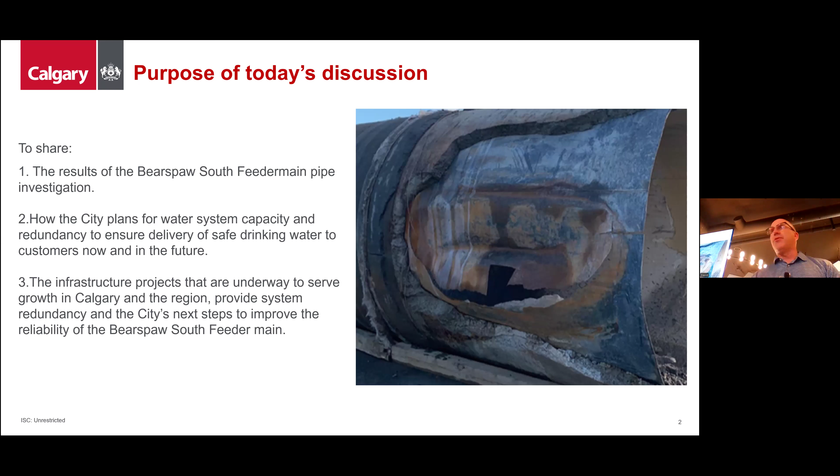So let's talk, as I said, love to geek out a little with you all and talk about the pipe investigation itself. As many of us are aware, on June 5th, 2024, the Bearspaw South Feeder main suffered a catastrophic failure. The feeder main is most important within the City of Calgary's potable water transmission network.

It consists of a 1950 millimeter PCC pipe, so it's a pre-stressed concrete cylinder pipe, as well as a 1500 millimeter pipe. Both of those were constructed in 1975, so almost as old as I am.

Immediately following the rupture, the city requested that Associated Engineering provide assistance and undertake an investigation into the failed pipe, and present the information gained during the exposure of additional pipes, also known as the 5 hotspots, during the initial failure. The cause of the June 5th failure was breakage of a sufficient number of pre-stressed wires in a pipe segment, causing a loss of pressure resisting capability in the pipe.

Based on the information available, we believe that the ruptured pipe experienced micro cracking or previous mortar damage, allowing for soil interaction with the pre-stressed wires. The micro cracks are, if you're familiar with the construction of PCC pipe, small cracks within the outside mortar layer that are invisible to the naked eye, but still allow the external environment to come into contact with the wire wraps.

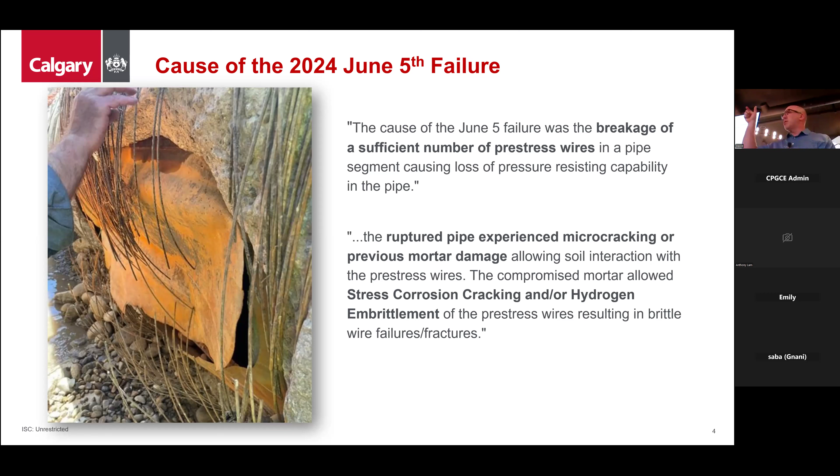In other words, some of these pipes, the mortar is actually susceptible to either sulfate attack and/or chloride attack on that outside mortar. Therefore, what we're seeing is there's some way that the chlorides from the outside soils had penetrated, most likely through those micro cracks that we weren't able to see.

Some of the things that did not contribute to the failure: first off, there's no information indicating that the manufacturing standards applicable in 1975 were not followed. I know that some of our councillors were trying to attest that we had substandard materials from 1975.

Some of them went so far as to say that the pipe, built and manufactured in Quebec, was susceptible to lower quality steel because of steel issues in Montreal and Quebec at the time, and that is definitely not the case. We had followed all of the necessary testing at the time and all of the construction standards of the time as well.

That picture, yes, the cracks in the mortar layer - is that as you found it, or is that because you've excavated? So actually that is found, that is on site. And actually that's a great question.

I can't answer your question, Nigel, about whether it's because it was unearthed and it spalled, or whether it was in that place already. My guess is actually it spalled after we started unearthing and exposing the pipe itself, and it just started falling off. The reason I suspect that is we actually had that occur at another location, just at Crowchild Trail a little further down, and I can give you more information about that.

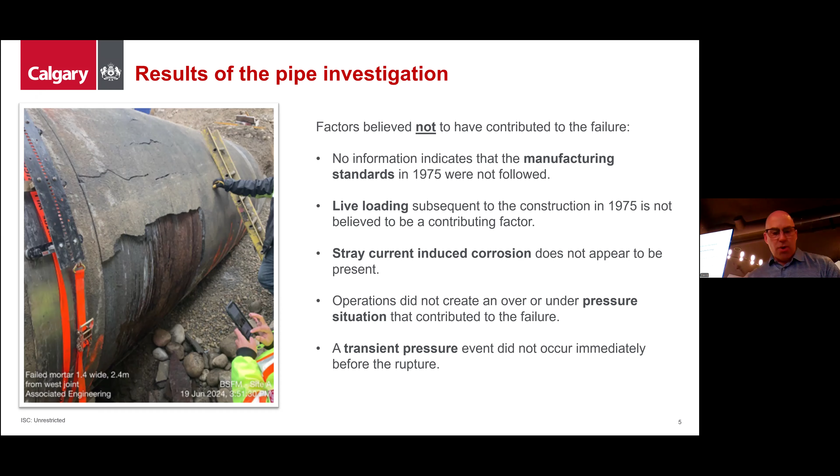Doesn't it share a right of way with the power line? There were power lines adjacent to it, and that's why we were wondering if there was a stray current issue.

But no, definitely, most definitely not. Steve, was there any indication of stress corrosion cracking in the wires? I'll get to that. Maybe I'll give you the short answer before I get to that in the presentation.

Unfortunately, this is part of forensic analysis. We found some parts of the pipe that had hydrogen embrittlement and stress corrosion cracking, but no evidence of structural deficiency within the pipe. Then we found some parts of the pipe that had structural deficiency, but no signs of SCC or hydrogen embrittlement. And then we had portions of the pipe that had both. So the answer is it's inconclusive to say that SCC was actually part of the pipe break itself. We were hoping to be able to pin that and say, yes, that's definitely the cause.

I think that's where in December, the discontent in the media and council was, we found the problem, here's the cause, most definitely it was this. And we couldn't provide that because of these inconclusive results, unfortunately, of course.

To continue with the results of the pipe investigation - and I'm sorry, maybe what I'll do next time, if I do hear a question, I'll just repeat it for everybody online that can hear. My apologies. The investigation report yielded the following observations: some pipes showed visible mortar cracks and delamination upon excavation, while other pipe had intact mortar. So to your point, Nigel, some of the pipes did delaminate as soon as we had removed the overburden.

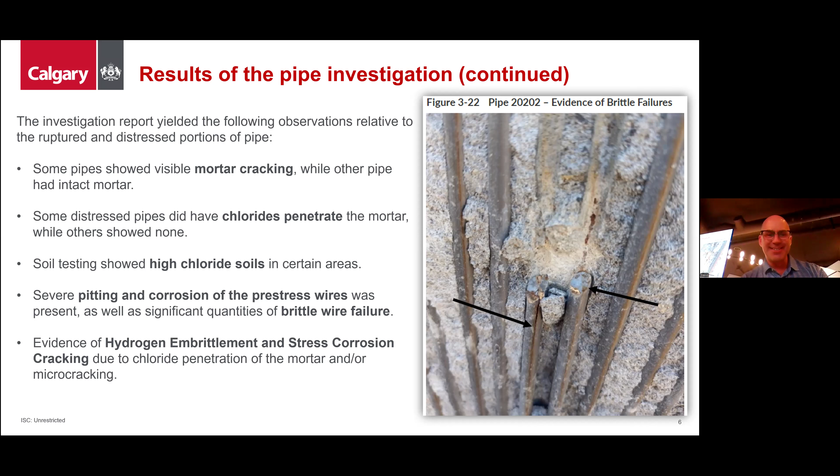Could the chlorides naturally occur? Stay tuned, this is one of my favorite topics. I got hammered pretty hard on that one in December, so we're going to talk about that one here pretty quickly. As a matter of fact, we're going to talk about it right now.

Soil samples obtained by Associated Engineering were gathered at 5 additional repair sites - what was called the 5 hotspots. Immediately following the original pipe break, we had hired a robot, brought in a robot. We had a robot of our own, but it was only able to do about 100 meters from the break. We brought in a more efficient robot from Ontario, and we were able to get about 2 kilometers up and downstream from the original break. That's how we identified the actual 5 hotspots.

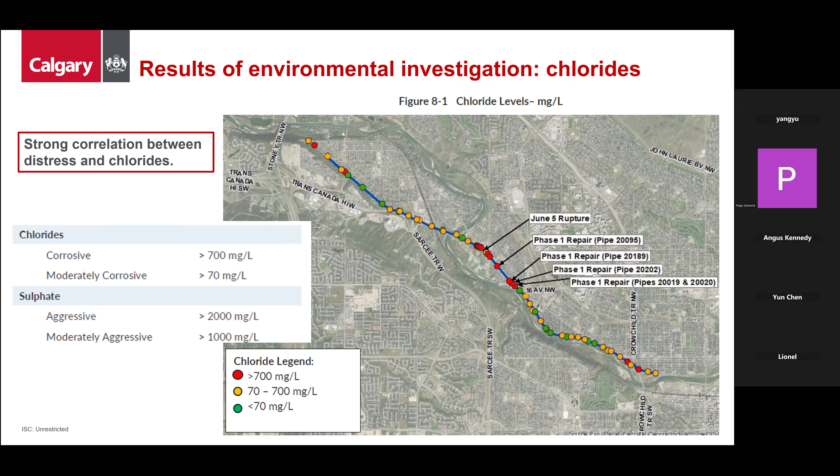In fact, the 5 hotspots were well in excess of the requirements we had for the number of wire breaks that put the pipe at risk. We found quite literally hundreds of locations up and down from the break where we had identified that the pipe was in some form of distress. So quite literally, the pipe was riddled and continues to be in areas having structural deficiency. That's the reason we've put in that monitoring system that I'll talk a little about here.

Back to the topic here. We obtained soil samples on the 5 additional repair sites, and that information, along with soil samples obtained back in 2014 and in 2024, is illustrated here on the slide. You can see low, moderate, and high levels of chlorides along the entire length of the feeder main. It's noteworthy that none of these samples showed any sign of aggressive sulfate levels, which is actually something we'd find more typical in Calgary, elevated sulfates in our soils and not elevated chlorides.

So what we had in about 2004, 2008 was a feeder main break up at McKnight. And McKnight, the pipe, again PCCP, was subject to a sulfate attack. The pipe mortar had become talcum, so it was falling apart. It caused attack on the pre-stressed wires, and then the pipe broke in that form.

This was not the case with this, where we're not seeing any sulfate attack. It was actually predominantly chloride attack. So that did take us by surprise.

The city's soil testing program tended to focus on sulfates. This is something we'll be discussing a little later in the presentation, but that's a major adjustment we've made to our asset management program. Our soils testing program is now starting to look at resistivity and chloride as well, as an indicator of where we might have to do additional testing.

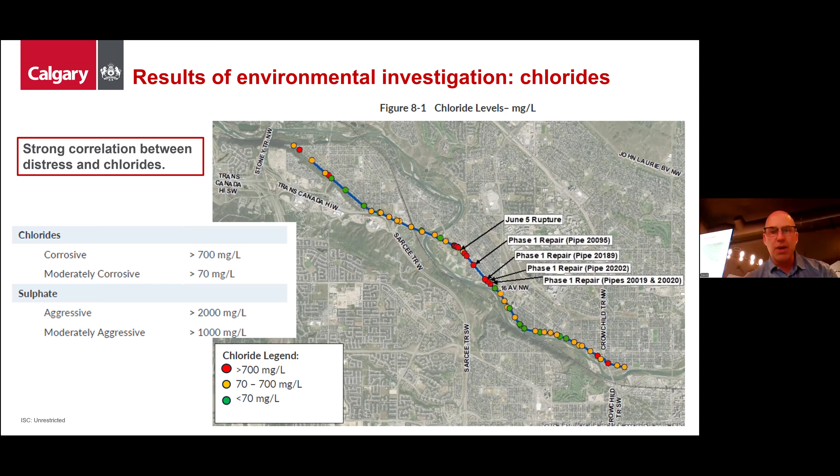The city also completed electromagnetic inspections of the feeder main using what they call a pipe robot, and what we call the pipe diver. Now, the diver is not literally like a 32-year-old guy that we put in a pipe with a mask. It's a robotic piece of electromagnetic equipment that looks like something NASA would put up into space. It's about 10, 15 feet long, and it uses electromagnetics to be able to sense. It induces the current into the wires, and it can sense that current.

And it actually can identify where there's a break in that wire and the continuity of the wire. So that's how it senses wire breaks.

So we've used the pipe robot, which is just a tracked vehicle that you would put in a dry pipe. And the pipe diver, it actually requires the pipe to be fully in service. So we're able to use a hot tap like you would in the oil and gas industry. You hot tap on either end of the pipe you want to inspect, insert the diver while it's in flow conditions, and you quite literally insert a net into the pipe at the other end, and you catch the diver. There's nothing too magical about that at all.

We actually did lose the diver. I was on vacation in BC, and one of my members said, 'Steve, we lost the diver.' It was stuck in a chamber, and they rattled the valves, and the diver popped out, and we caught it again. So the magic of basic engineering, it's amazing sometimes.

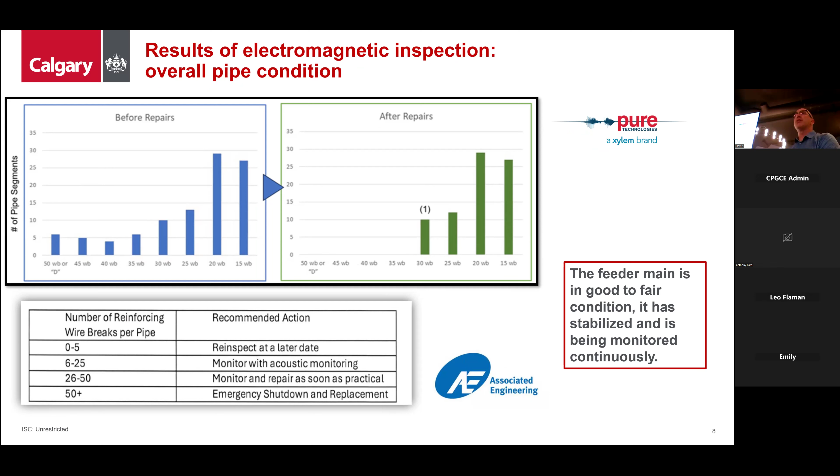I'll keep on trucking - these are awesome questions. Thanks.

So if the main culprit seems to be micro cracking and chloride infiltration, are we putting a coating on the pipe now? No, not with PCCP. I'm not enough of a pipe expert to answer in detail, but the answer is no - we don't use coatings on PCCP. If you'd like to find out why, I'll get your contact information after and follow up.

So as I said, continuing with the slide - with all of the repairs being made, we are now operating with a very few number of wire breaks. In fact, the number of wire breaks we've had since November is 5, and those occurred at locations that had 0 wire breaks to begin with. So the pipe is just naturally aging - it's just progressing over time.

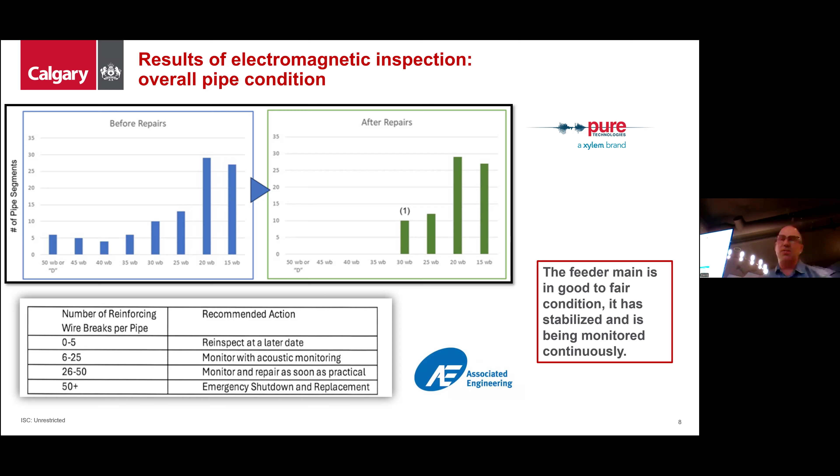The question is, are we doing anything with regards to the soils we found? That's part of a subject we're studying right now. The quantity of the soils and their location relative to the Trans-Canada Highway, either adjacent to or directly under it, would warrant us ripping up the Trans-Canada Highway. So that's what we're trying to figure out right now.

Why did they get there to begin with? We believe it's because of road de-icing materials, but how to remediate, if you can remediate at all, that's part of the question. One strategy might be recognizing you have high chloride soils, and now you monitor the pipe and do repairs as need be. That's also part of the repair strategy I'll talk about further on. I'm well over time, but I hope you guys are okay if I keep on trucking.

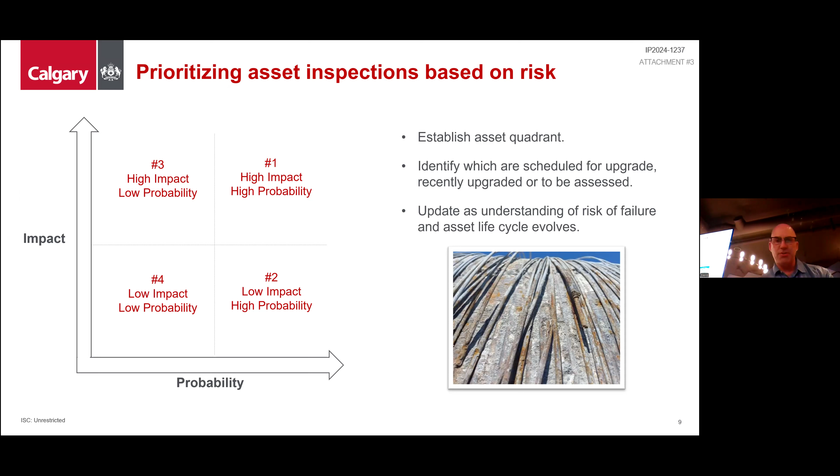So maybe what I'll do is just pass on through here for the sake of time.

Some of the lessons learned from this - please don't get me wrong, Calgary truly does have a world-class asset management program with our water utility. Water utilities around the world come to us to see what we're doing. It sounds hard for me to say that, because on the flip side, people ask, well, why did the pipe break? I hate to sound flippant, but pipes do break. It's unfortunate that this particular pipe, such a critical pipe in our water network, broke. But it allows us the opportunity to do a lot of soul searching and lessons learned.

One thing we're definitely taking away from this is learning about the chloride attack and the need for us to start using resistivity testing as a preliminary sample to determine where we need to focus our further in-depth testing for chlorides, and then do more destructive or invasive testing as well.

We're also starting to look at other identified mechanisms and factors, focusing on feeder main risk assessment and redundancy. Back in 2008, and reaffirmed in 2015, this pipe was considered highly critical, if not the most critical pipe in our feeder main network. But on the flip side, it was considered low or incredibly unlikely to fail, because at the time we were doing sulphate testing and didn't see sulphate attack. The pipe was relatively young, we'd been modeling it, we were doing all the things we thought we needed to do, and the pipe broke.

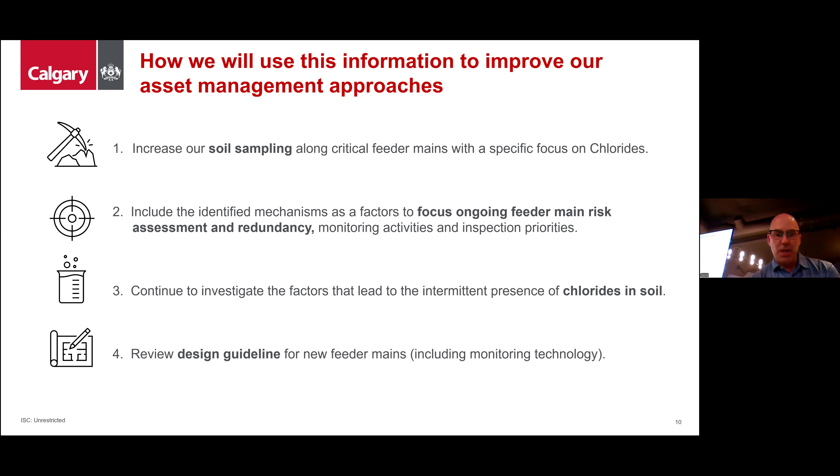On to water system planning. Coming out of this, I'll provide you a little information about how we plan for the water system.

This is actually outside of my domain of control. It's one of my peers, Sarah Huber, who does this. If there's a broken asset, we'll identify it, assess it, and fix it. Her team is the one that models the entire system, the network, but I'll try my best to parlay the information she's providing us here.

The City of Calgary's water system is designed to provide a maximum day demand in normal working conditions, and an average day demand is planned for emergency or infrastructure outage. This planning criteria applies to all of our infrastructure, from our raw water intakes to your customer taps, and it aligns to the provincial standards that were updated in 2021.

Maximum day demand is the highest total volume of water produced in a single day in a given year. In Calgary, our maximum day demand is often on days of 30-degree weather, either in June, July, or August, as you would expect. It'd be weird to see a 30-degree day in January. Minus 30 is more probable than plus 30.

Average day demand is calculated by taking the total volume of water produced at both water treatment plants over the year and dividing by 365. In Calgary, an average day of water demand is similar to the demand on a shoulder season day in April or October.

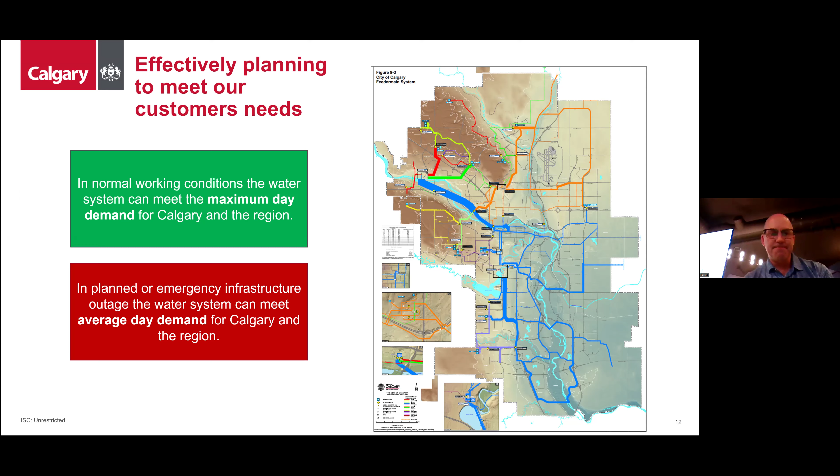So how many days would you exceed your max day? You would never design a hydrocarbon system like that, never.

We do actually have storage within the pipe itself, and we also have a reservoir system. There are a number of reasons, predominantly growth, where we're starting to see that we're bumping up more frequently to our max day demand. So over the past two decades, it's not just about building new infrastructure to accommodate for the needs of growth.

Over the past two decades, Calgarians have reduced their per capita water use by 30%, enabling an overall demand that has been the same since 2003, even as the population grew by 500,000 people.

If you bought a toilet in the 2000s, and got your $50 rebate from Home Depot or wherever you were buying it from, that was actually subsidized by the City of Calgary. It's those kind of non-asset solutions that really go a long way for helping reduce water consumption. We've implemented a range of tactics and worked in partnership with Calgarians since the 1980s to reduce water consumption.

While we've made great progress, challenges around water availability and rapid population growth necessitate continued focus on water efficiency.

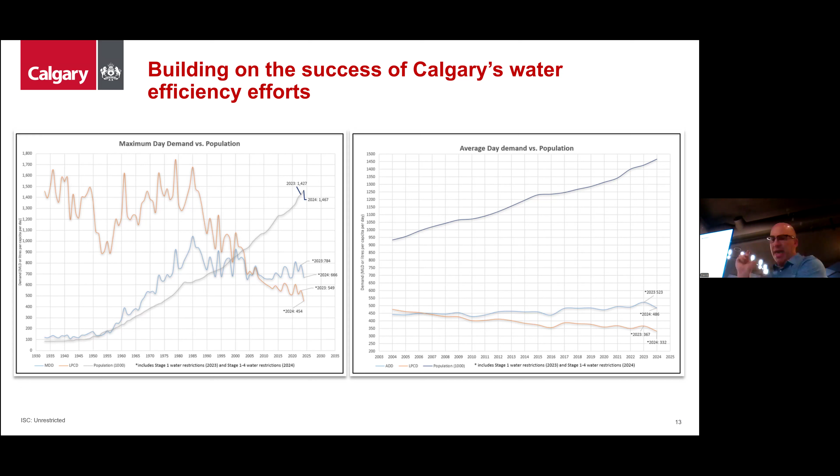So we had talked about that. I'll just move on to the next slide.

In the near term, as water demand in Calgary increases, the need for major infrastructure, including new and expanded water treatment plants and feeder mains, is required. These investments serve growth in Calgary and the region and provide system redundancy. This infrastructure is complex and challenging to design, usually resulting in a project timeframe well in excess of 10 years from planning to infrastructure being built and put in service.

The feeder main project shown on the slide will increase Calgary's water transmission capacity, ensuring there's capacity for the water system to serve growth, to provide redundancy around the Bearspaw South Feeder main, and reduce reliance on our existing feeder mains like Bearspaw.

We're also building water treatment plant projects that will increase water treatment and raw water capacity, ensuring that we have sufficient drinking water to supply growth, both in the Glenmore water treatment plant expansion and our new expansion up at the Bearspaw water treatment plant.

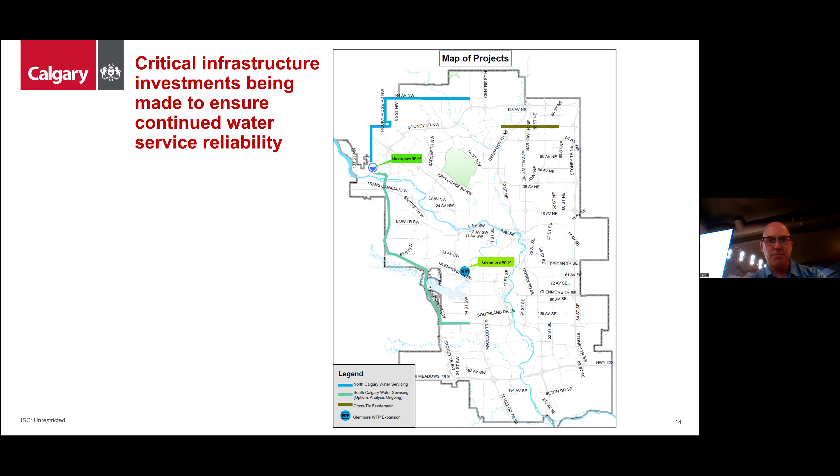Question, go ahead. So with all this growth and ongoing extension of water lines, etc., how large a challenge is it to maintain consistent water pressure in your home? The question was how difficult or how much of a challenge is it to maintain water pressure with all of the growth?

I will admit that's not my bailiwick. I apologize. If you wish, I can get you the answer to that. If I were to speculate, I've never heard that we have a challenge trying to maintain water pressure. We do recognize there are parts of the city that are underserviced by pressure and sometimes overserviced as well too, due to either geography, location, adjacency to reservoirs or pump stations, et cetera. I'm sorry, I'm not able to answer the specific question itself.

Let's talk about the reliability of the South Feeder main. So as we talked about in council in 2024, we're continuing to operate safely the Bearspaw South Feeder main.

And while the North and South Calgary water servicing projects, those are the two that you saw literally splitting from Bearspaw to the north and to the south, they'll allow us to move water adjacent to the Bearspaw South Feeder main to supply water during the average day demand. The feeder main, we still require it to provide maximum day demand. So we will continue to rely on the Bearspaw South Feeder main.

That is one of the reasons why we're spending so much time and effort monitoring the pipe. We can't just decommission the pipe, take it out of service. We will continue to require that pipe.

In order to improve the reliability of the 1950 pre-stressed concrete cylinder pipe, we have several rehab and replacement options that are currently being identified now. Those options include open cut pipe replacement, external reinforcement, internal lining, and microtunneling of the new line.

Now you can see the location, I guess that's in the next slide. Actually, I'll just continue here. I'll show you in the next slide what the proposed alignment looks like, but the microtunneling option is the option we select as the most promising at this time, as the construction technique minimizes traffic impact and water service disruption, as well as minimizing impact to adjacent homeowners and businesses.

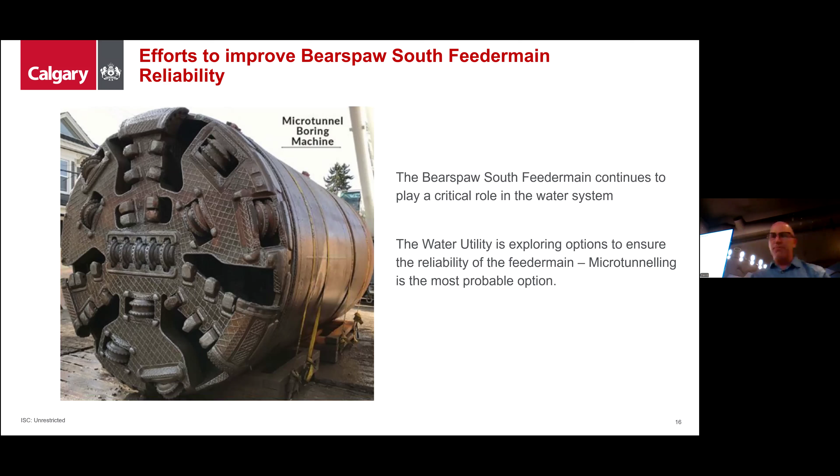So if you're familiar with the location of the feeder main from the previous photos, you can see it roughly here, the Bearspaw feeder main runs through on the south side of Bowness. There's actually a personal friend of mine that lives on 33rd Avenue, right in the middle of where the feeder main exists on her street.

So of course, we're very mindful of community impacts, both immediate community impacts and as well the adjacent community impacts because of the proximity to businesses along 16th Avenue and within the Bowness community. We did get a lot of traffic shortcutting as you would expect as we're doing construction to try and fix the feeder main. That's the reason why we would propose a microtunnel option.

So it's going to be a two-phase approach. The first phase is the section here from Shaganappi Trail, Edworthy Park, roughly speaking, all the way up to the Bow River crossing, what we call the Rona. There's a couple of locations, hotspots in around the Rona location.

And then the second phase of work would be on the other side, the west side of the river, heading right up through to the Bearspaw treatment plant.

One of the options we're looking at as well too is either leveraging a new right-of-way along CPKC, the rail line. That would allow us to do open cut as opposed to a more expensive microtunnel option. But that's one of the other things we were thinking about as well too, but now you're looking at a whole host of other issues with Department of Fisheries and Oceans, regulatory—you know the world if you're from oil and gas.

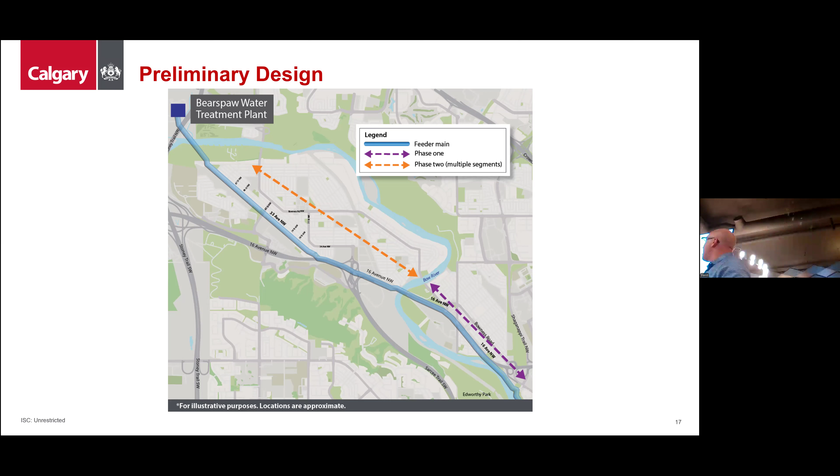We're looking at all of these options and trying to balance cost effectiveness as well as community impact. Mindful also that any solution we choose has to tie into the original pipe at the plant, so there will be inconvenience to the public as we take this out of service.

So what we want to do is time it so that it's in low water use season. We're not worried about max day demand, we're worried about average day demand, so this would be a multi-year approach to minimize impact to Calgarians, hopefully never having to turn off the water taps.

So microtunneling will go under people's houses? Literally under. Live in their houses? Absolutely. When you say deep, how deep? I don't know, that's subject to detailed design. We'd have to figure out where stable material is, bedrock, etc.

That's part of the detailed design as well, with the microtunnel - do you put in another 1950? Do we size for growth? Are you doing multiple pipes as opposed to one pipe, so now you have redundancy, but even with a smaller pipe, et cetera? There's a lot of options.

So, sorry, I keep forgetting for our online friends - the questions were: how deep? I don't know how deep, the kind of material, how big would it be, would it be a 1950 or not? I would expect the tunnel itself would probably be larger than 1950, and it would basically be a conduit, pipe in a pipe. So I don't know exactly what the design would be, if it's multiple pipes or just one pipe that you'd put inside. That's something we're considering.

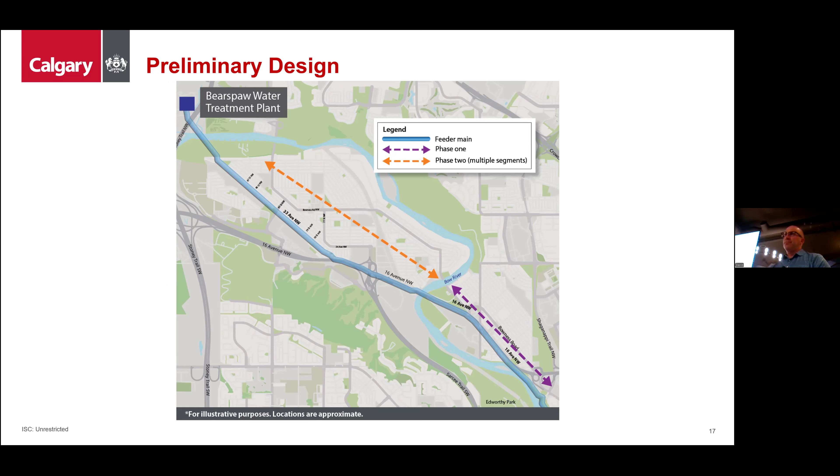Have you thought -- this may be a silly question -- of dosing those areas of ground with high chloride concentration with an alkaline solution? No. Not to sound obtuse, but that's still something we're trying to figure out too -- we don't have a program like that for the city, so the short answer, sounding horrible, is no. Because you are spending significant resources measuring the chloride concentration so you know where you need to neutralize the soil. We found there are very localized areas of high chlorides, even on this pipe -- specifically around 16th Avenue, that motel village area, is where the high chloride concentrations occur. We don't know if that's irregular for the rest of our feeder main network, and that's where we're doing soil sampling as a first step towards understanding whether we have other pipes at risk, or need a larger remediation program like that.

Because it would be an additional anode you put in if you have a hotspot. It is true, and this is actually part of our first step, to identify if we need those additional anodes. This is where we're trying to do those tests on the other parts of it.

I apologize for taking you way over time, but it's been an absolute pleasure talking with you all. Thank you.

I'd say we should thank Steve -- one of the most informative talks we've had, and we apologize for all the questions. Don't, no, I'm gonna stick around, I'm gonna have a beverage here, so. Definitely the techno nerds who wanted to meet on council but didn't get to.

Yeah, oh thanks -- because you gave that talk tonight, CPGC has donated to Operation Eyesight, and the person named here has received sight because of our talk. So thank you so much. Guys, make me weepy. Awesome. That is actually truly meaningful. I really appreciate that, thank you for doing that.

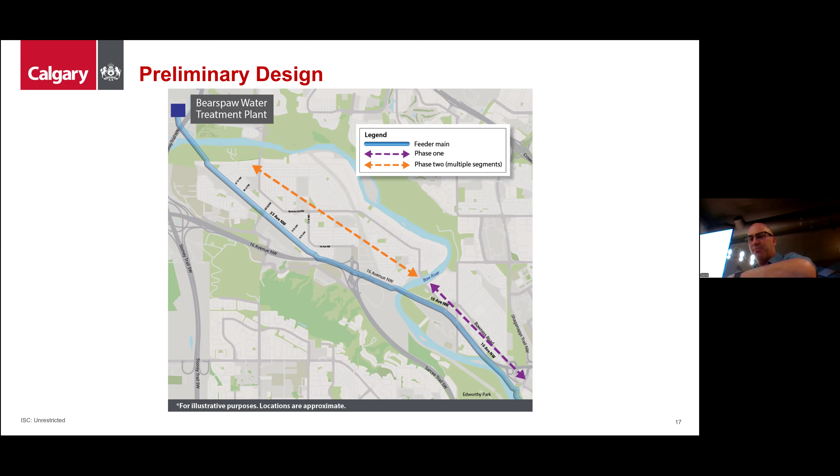Thanks for having me, I'd love to stick around as well too if you'd like to geek out for a little bit. So I think my kids are probably already going to bed. So whatever, what's another -- go ahead.